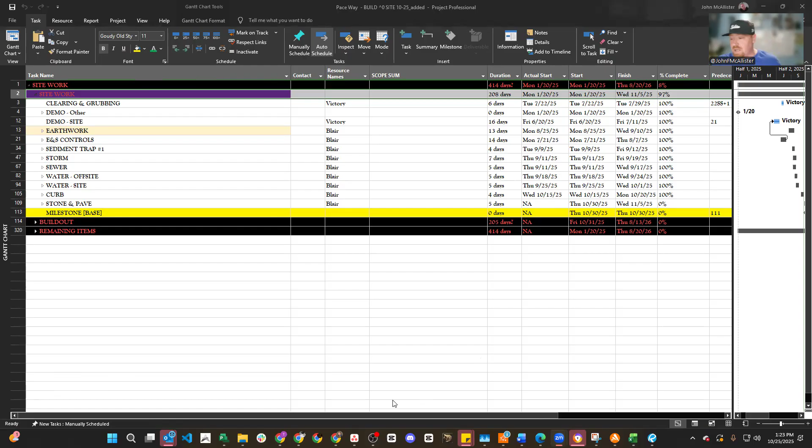So today, what I want to do is just go over real fast. As you guys know, we're building out Pace Way Community Development, and we're at a point now where we're about to pave or hit our milestone, which is our base pavement. We're actually going to hit that on 10/30. We're scheduled to pave. Originally, when we first started this way back in June, I had built out this schedule and projected that we're going to pave by 10/10.

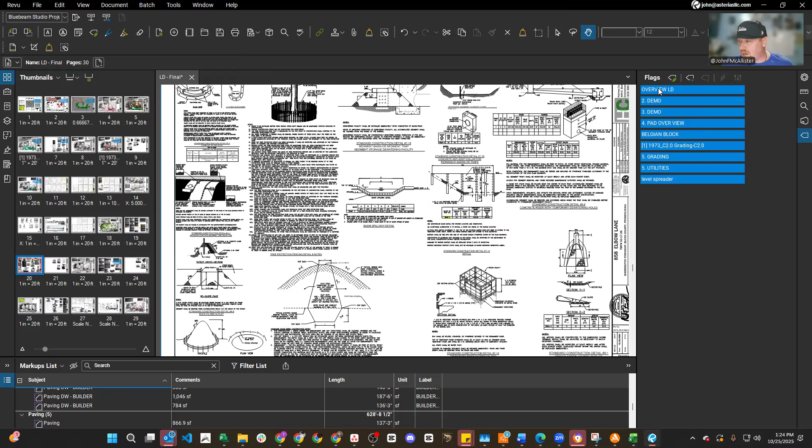Now, due to a couple delays that happened, waiting for water testing, running into some paperwork and permits and things like that, and some weather delays, we are now going to pave on 10/30. Now, if you think about that, we're about 20 days behind schedule, which in the big scheme of things, we can make that up because our site work is basically complete. Now, you might be thinking, what the heck are you talking about? Well, let me just go over real fast for this project. Now, all projects are different.

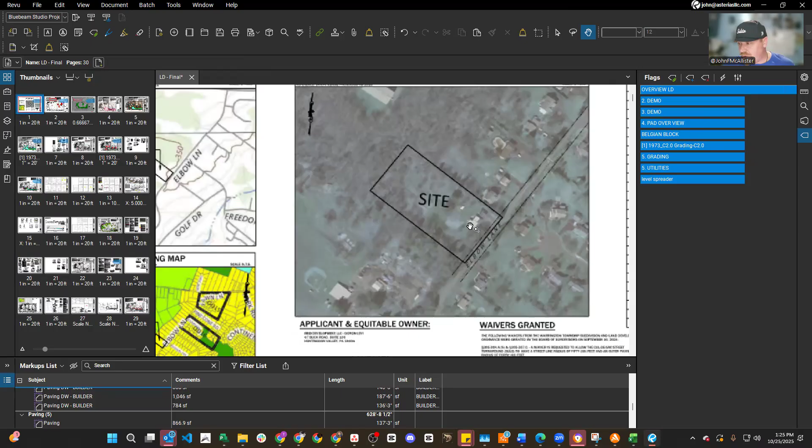This project started off a single family home, and we actually went in there and cleared. So if you look at this picture, this is an aerial view looking down. In the township, there was a single family home. There was a chicken coop back here. So we came in, we demoed the chicken coop. Actually, Pace Morby was there doing that. He started that. Then we came in, we demoed the house.

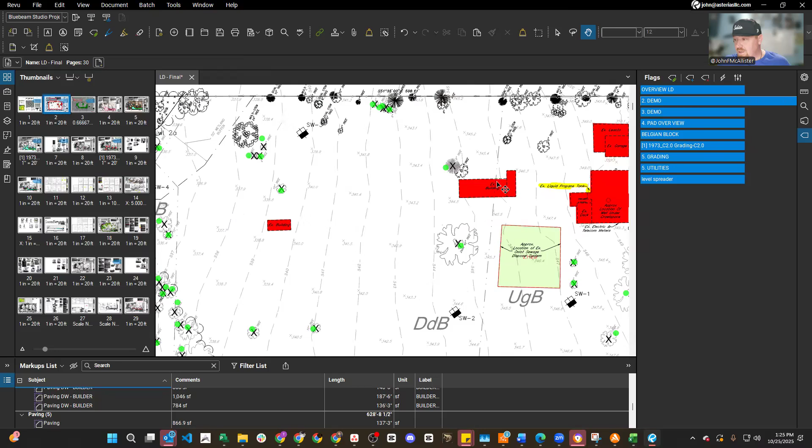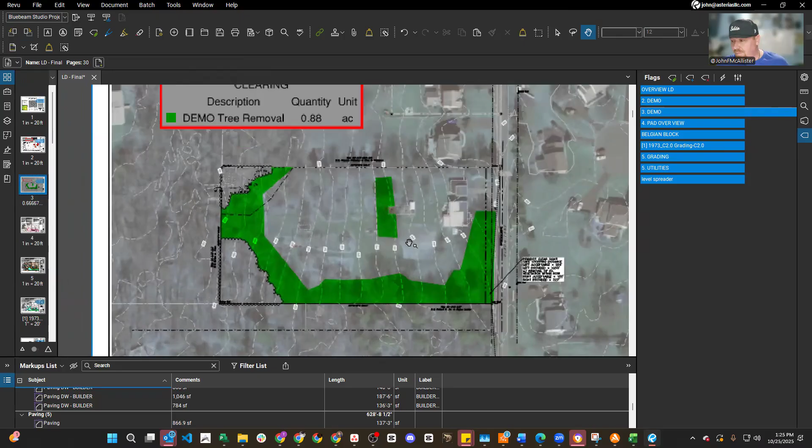And here's your demo map, right? So here's the existing building, the chicken coop. There was a single family house. There was a garage. We took care of that. We took care of this, demoed it. And then we came in and cleared. So with the clearing, and I use this software, I've been using this software forever. I love it, Bluebeam. I just love it. It's good for takeoffs, good for documentations.

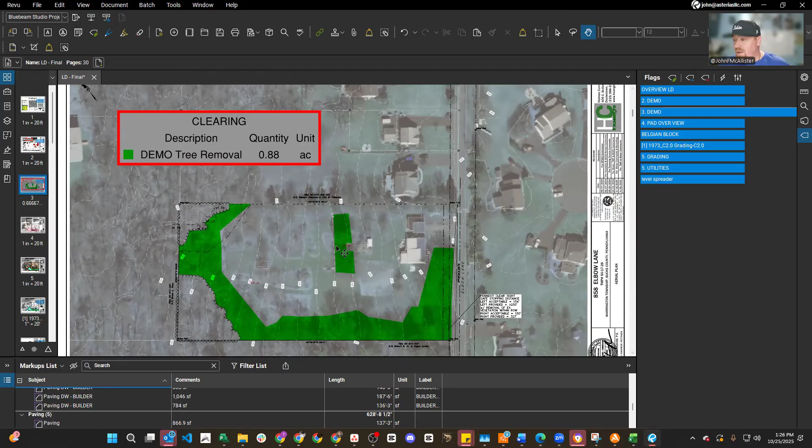You can export stuff. But anyway, this is basically the tree line that we ended up cutting down, and we actually ended up cutting down some of these branches over here when we ran the water line. But this was all of that. We took that off. We came in here. We set our E&S controls up around the site, which basically is required per the conservation district. We demoed the houses, we cleared all the trees, and now we're in the process of building out these separate models and pads.

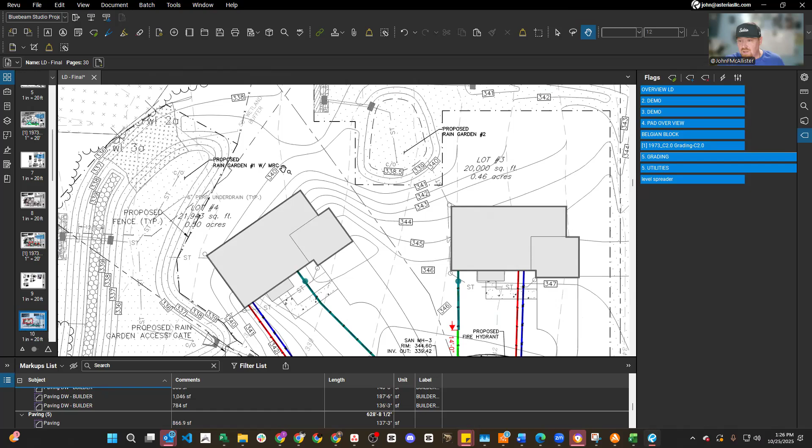So, what did that entail? I mean, we had a bunch of grading. If you look at these plans, and this is just a typical overview, if you've never seen a grading plan or look at grading lines, you have existing versus the proposed. So this project was a 5,000 cubic yard import. So this area in the back here was low. So we had to import 5,000 cubic yards of fill and build this up to the proposed lines, which is right here.

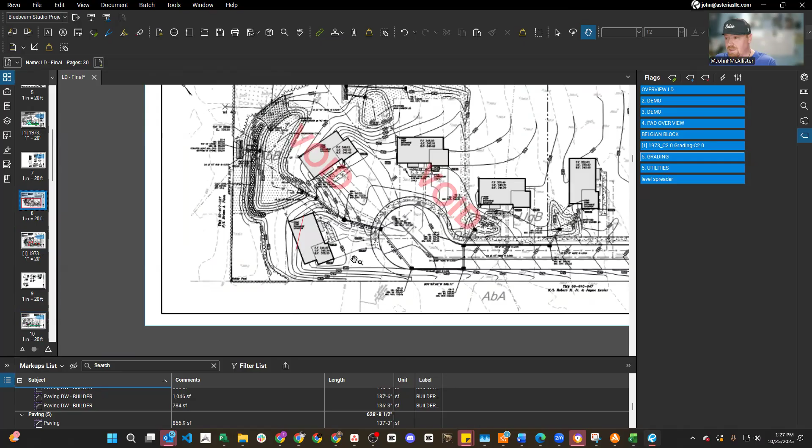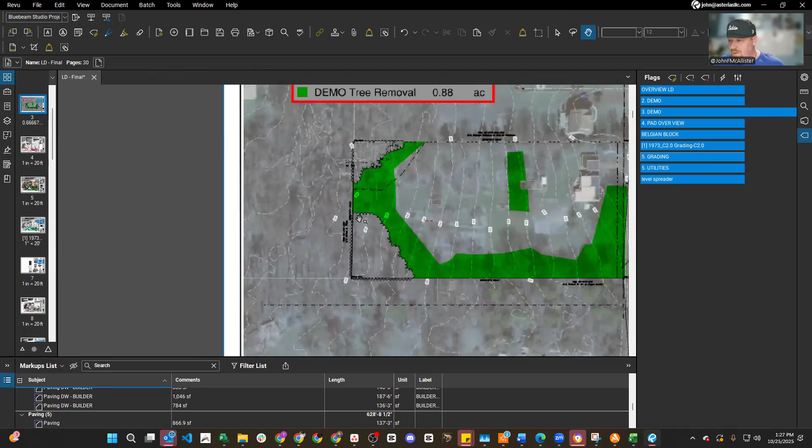And I can show you the existing grading lines. Let's see if I can find that sheet. Oh, right here. So even on the demo, they show you the existing. So if you look at from up here, you're at 351. And back here, you're at 336. So if you take 351 minus 336, you got about a 15 feet drop from front to back. So in other words, up here in the front, it's over there, and then it goes downhill. So we had to fill back here to bring it up.

But now, what we did was we came in here, we did all that. We put in the sanitary. We actually tied in right here. There was an existing main running, so we tied in. We put in new pipe. I have videos of that on my Instagram of us doing that. We actually ran water up the side here. I also have videos of that.

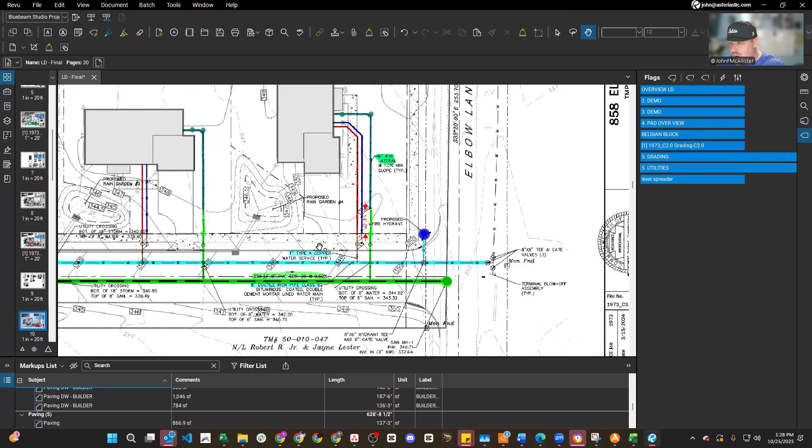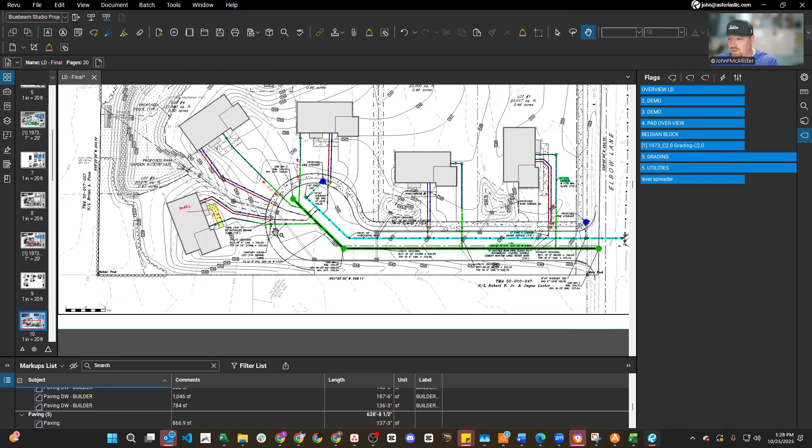And then we tied in. So now we have all these water services. And then the previous video that I did, you can see that the cleanouts are right up, right above, or right out here, where we're getting ready to now start with the pads to go vertical. So that's basically it for the site work. The site work now is basically done until the next phase, which will be in 2026. Here's some other shots which shows your elevation view.

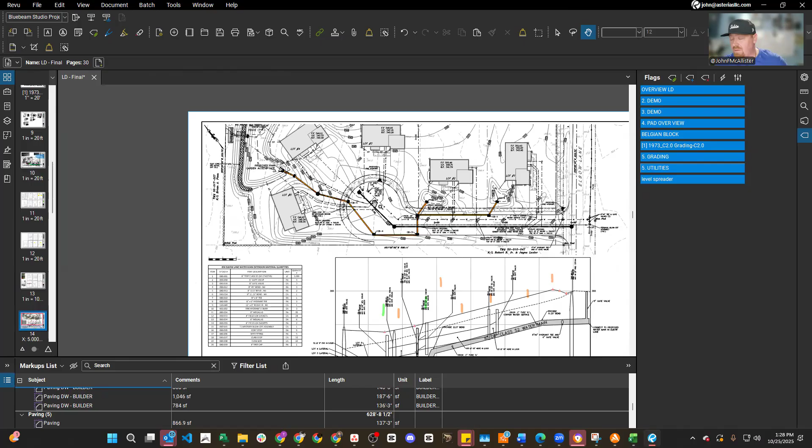So you have aerial views and then you have elevation views, which basically show your water main and your storm. Typically, storm's orange when you mark this stuff up, sanitary is green, and blue obviously is your water. Red is your electrical work and things like that. But that varies from person to person. Here's some profiles of the sanitary sewer, just to give you an overview of typical plans.

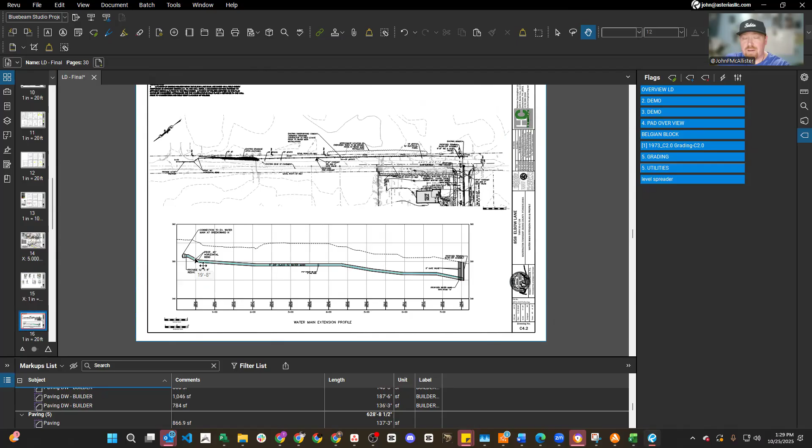I remember when I first started doing this, it was overwhelming, but once you know the basics, it's like driving a car. You get in any different type of car, you have a gas pedal, you have brakes, you have shifts, you have automatics, you have a steering wheel. It's all basically the same stuff.

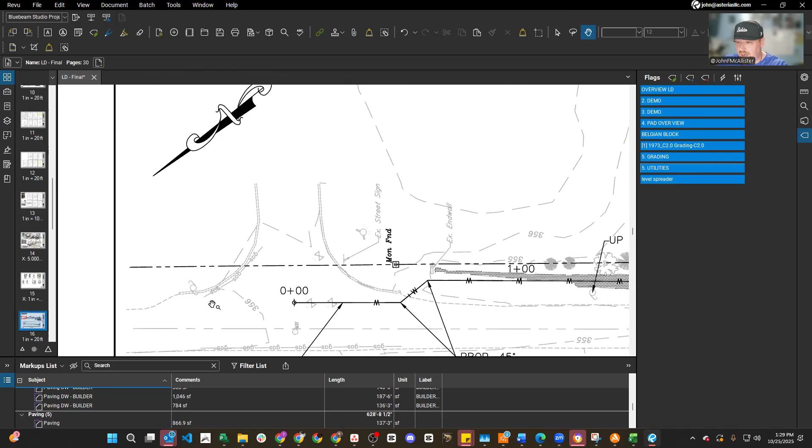So here's the water line that we put in. If you watch the videos, we actually crossed the street and ran that all the way down here. You can see the existing curb line right here. There is a water main that comes down here and then shoots up to this development, and we actually tied into that. So now Pace Way Community Development will be fed water. And we also have to do sprinklers, which will be provided through the water.

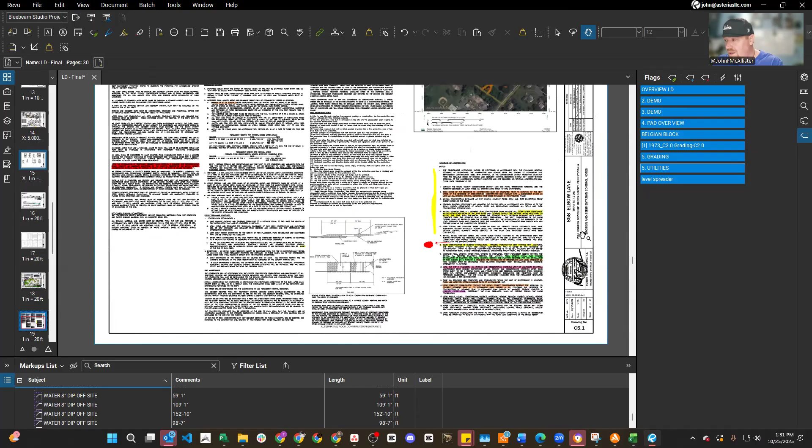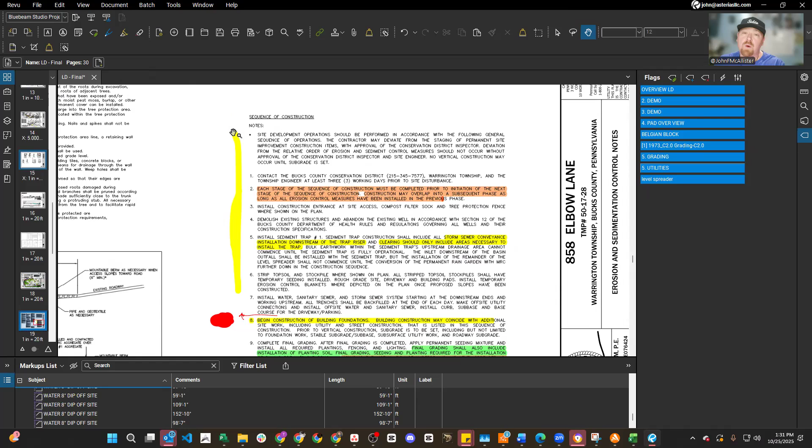Here's an important one, usually on the erosion and sediment control notes, which is your sequence of construction. The conservation districts, which are in every single state from what I understand, are basically the police of your storm management. They want to see that you do all of this stuff in sequence. Now you can work with them to get some of this stuff logically moved. But note here, number 8, begin construction of building foundation.

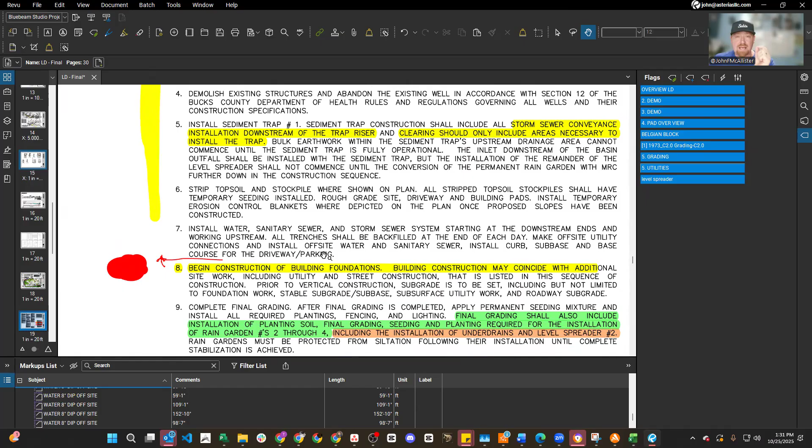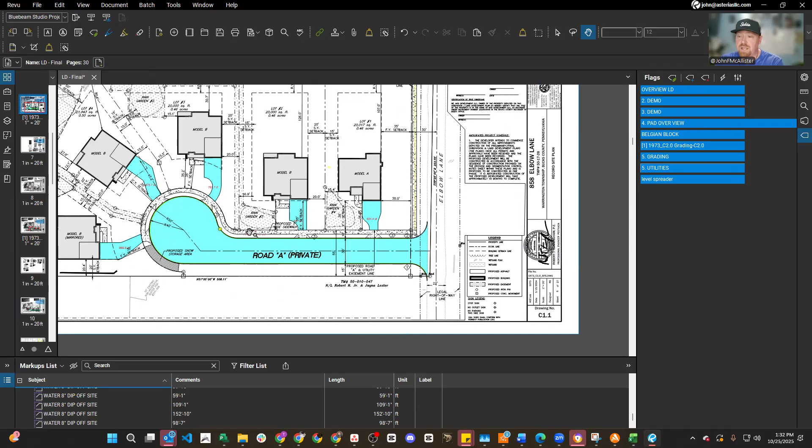So in other words, in order for B to happen, A has to happen. So what is A? Basically your sub base. That's what we're going to be doing, your 4 inches of sub base for the pavement. Once we get that down, if you go back to the site plan, that's this right here, we're going to put our base pavement. Now, why do they want that down before you start building vertical? God forbid there was an emergency and fire trucks needed to get in here. They can't be driving a fire truck through the dirt. So that's for safety reasons, and also for sequence and proper runoff.

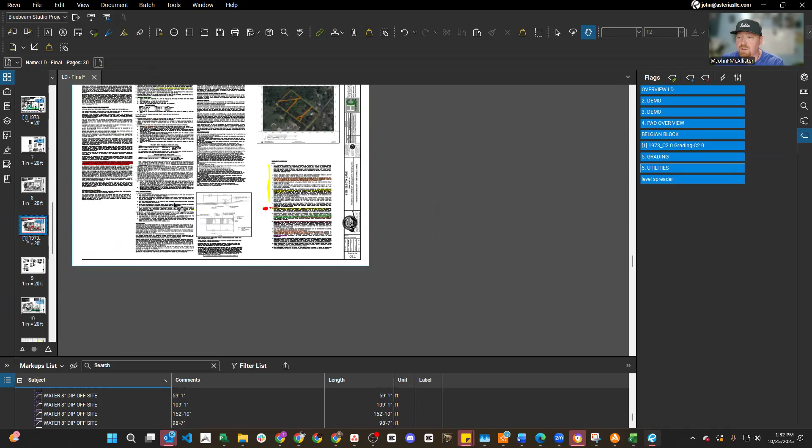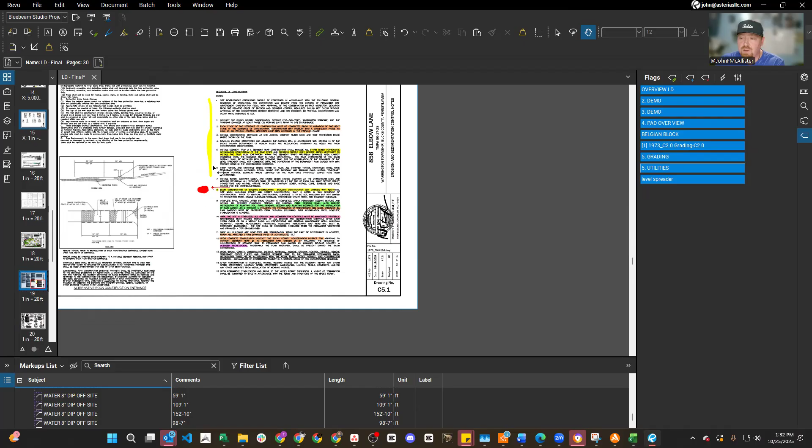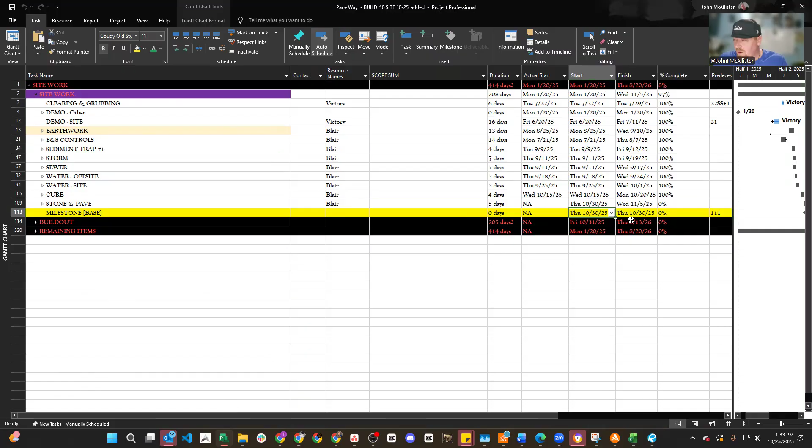So go back to the construction notes. That's very important. When you deep dive into here, you know what you need to do. And like I said, when you have a pre-con meeting before the project starts, you can request certain things if it makes sense. So right now, we cleared, we did the demo, we did the earthwork. We did our erosion controls, established our sediment trap, did our storm work, our sewer, our water. All this is complete. We're hitting our milestone now, which was bumped 30 or 20 days. So now we have our build out.

And what I'm doing is starting to go through this. So I have my site work 2026. Basically what remains after we're constructed, we're going to do our landscaping in the meantime. I'm still framing this out and putting logic behind it. In other words, step one, two, three, four.

I shared with my team today about the Panama Canal. If you want to get from the Atlantic to the Pacific in a ship, you have to go through each chamber. Once that chamber fills up or lowers you, then you can go into the next chamber. It's the same concept with a schedule, urgencies, priorities and milestones: you need to get the first chamber completed so you can move on to the next. With a schedule, sometimes the chamber can be half completed and you can start the next task. So that's how we do it. So now we are done with our milestone with the base.

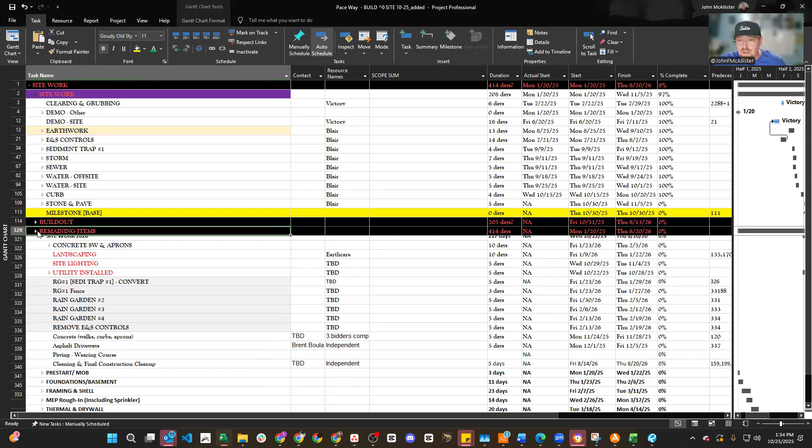And I still have site work. If you think about the horizontal work, right? We still have some of that left. We're going to wait to do the sidewalks. We're going to wait to do the aprons because we don't want that stuff getting damaged. We're going to wait to do the driveways.

We're going to wait to do the landscaping because we're going to have dirt still being moved. We're going to have basements being moved. We're going to have equipment out there on site. We still need to put the site lighting in, which will be run parallel with the dry utilities, which is your gas, electric, communications, etc. That's going to go in.

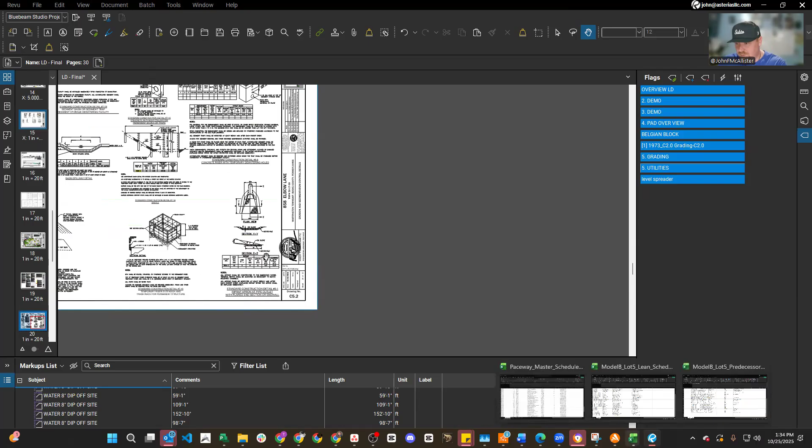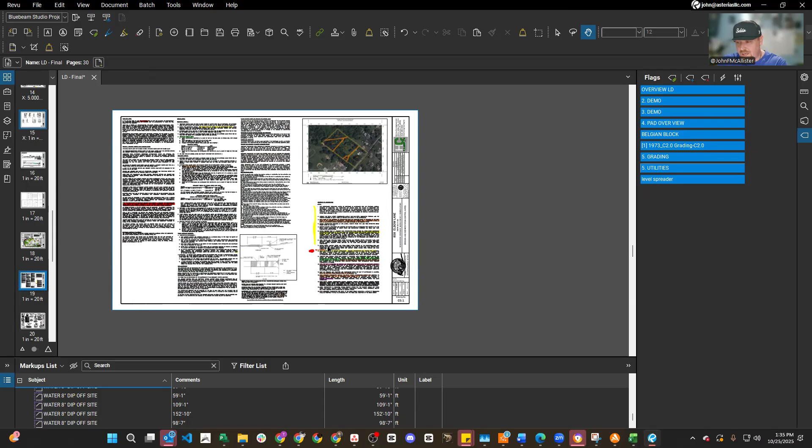And then at the end, we need to convert our rain gardens. So if I go back to my plans, and this is typical on most job sites these days because of the way that they have DEP and different construction laws and regulations, and God forbid you have a little bit of cloudy water run off to another site. God forbid you have dust.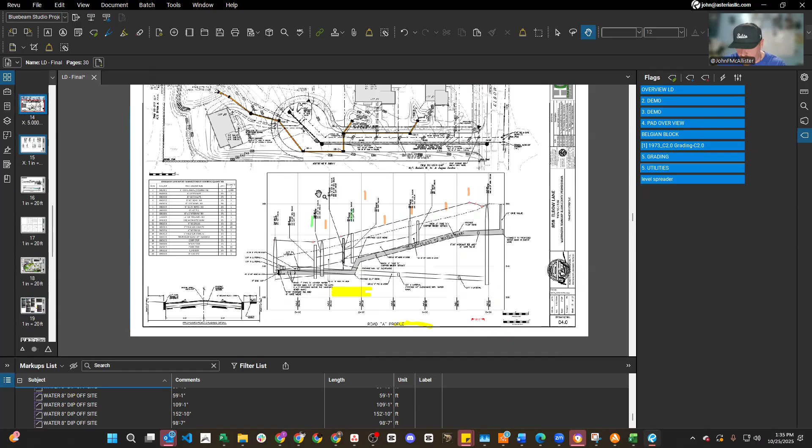They call it fugitive dust that gets stirred up on your site and then drifts over to someone else's house. That's called fugitive dust. So they're very big on that, as they should be. I mean, it's safety and it's for the environment. So at the end here, this is the basin conversion.

What we're going to do is we're going to come in here and we're actually going to scrape out any silt or debris that's in here, and we're going to fill that with like 2 feet of amended soils, which is like a compost that you would use for your gardens mixed with some sand. I don't think we get sand on this one, and then we're gonna plant some small plants and shrubs and things like that.

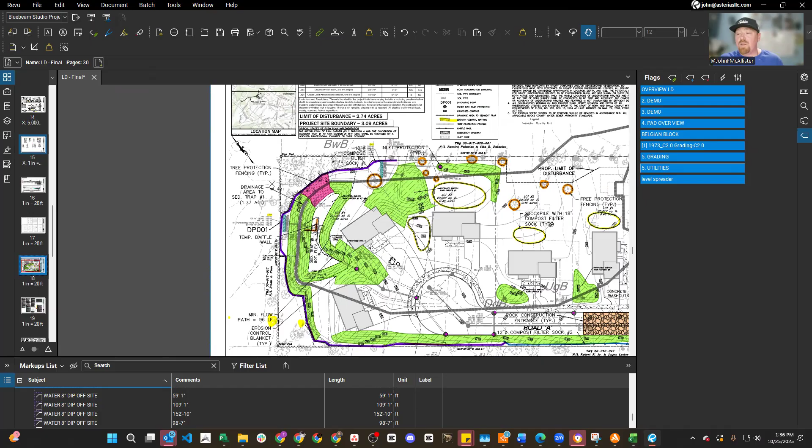But if you ever go onto a job site, an existing development, warehouse, anything, you're gonna see these basins, and that's part of construction. And it's very important, and it can range from simple to really complex. I've built supermarkets, warehouses, where they have these huge underground basins to manage the storm. It's like millions of dollars. So this site, pretty basic, little basin, a couple little rain gardens.

But anyway, back to the schedule. So that's next year, 2026. So I'll be working on that, making sure that's all lined up. Obviously, we got our asphalt driveways, our paving, the wearing course. So we put about 4 inches down for the base, and then when we're done the job site, we put that final top coat of 1.5 inches after everything's done.

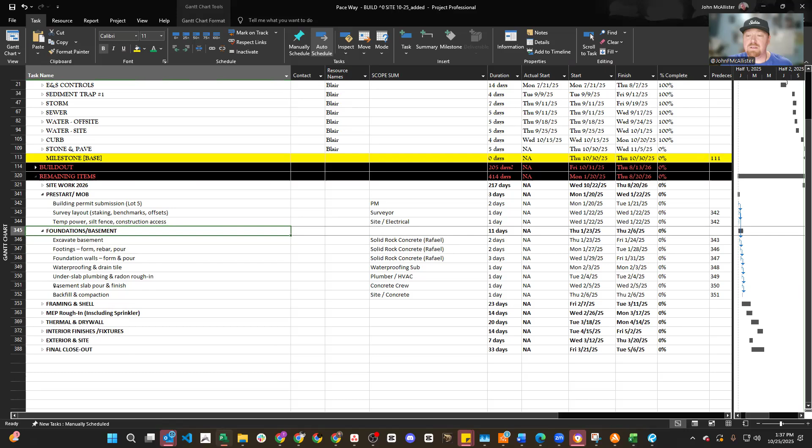So now what I'm doing is I'm framing out the construction part of it. I'm just framing it out, and I'm going through logically. When I say logically, again, going back to that illustration of the Panama Canal, in order for you to get to compartment B, you need to finish compartment A. For example, in order to start framing, you need to finish your foundations. And then when your foundations are done, you do your framing, you do your shell work.

And then from there, you do your rough-ins, your less flexible materials that are solid state or hard versus ones you can move around. And then you do your insulation, drywall. So that's where I'm at today. I am going through that and I'm framing this out. I hope that added value to somebody and you can kind of see.

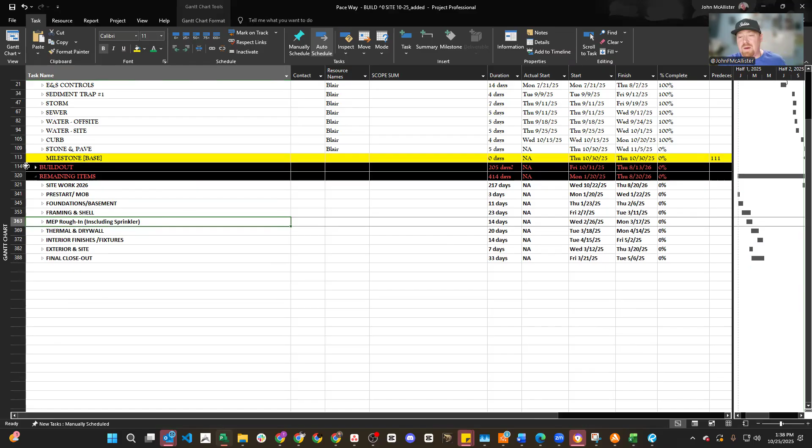And at the end of the day, I was telling the developer of Pace Way Community Development, because I'm working through getting the building permit, and he was like, it's really not that hard. I'm like, yeah, I understand, but I never did a building permit before. So you can't learn how to fight by reading a book. Sometimes you just gotta have that fight. You got to get into the ring, however you want to frame it out.

You need to learn, get hit, understand what it's like to get hit, understand what it's like to fall down. But what's awesome is you just keep pushing through it. And guess what? Thousands of people have done this before. It's really not that hard. But for me, it's learning and getting it down. But for schedules and stuff, I'm a pro at this. I've built thousands of schedules.

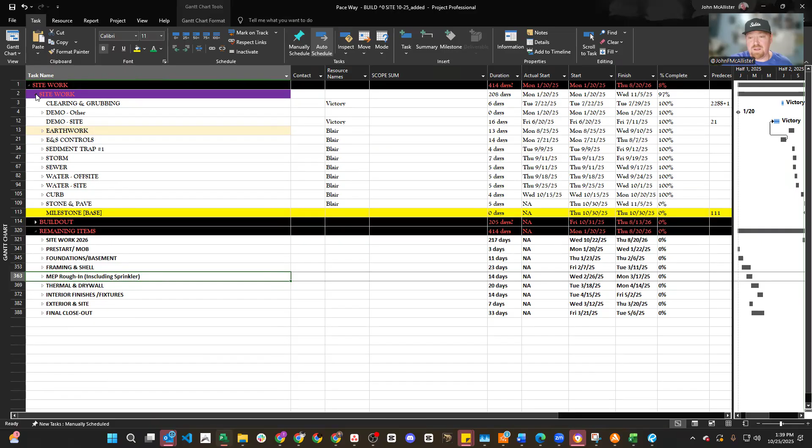I've done thousands of site work developments as far as groundwork and planning, but not the building aspect. So just working through that. But I understand schedules, and you can see I'm already framing this out. I understand construction, and it's all the same thing. It's just wrapped with different wrapping paper. But when you open up the box, it's still all the same concepts inside. So that's where I'm at, and I'll make another video when we start with the foundations and when I finalize all these schedules.